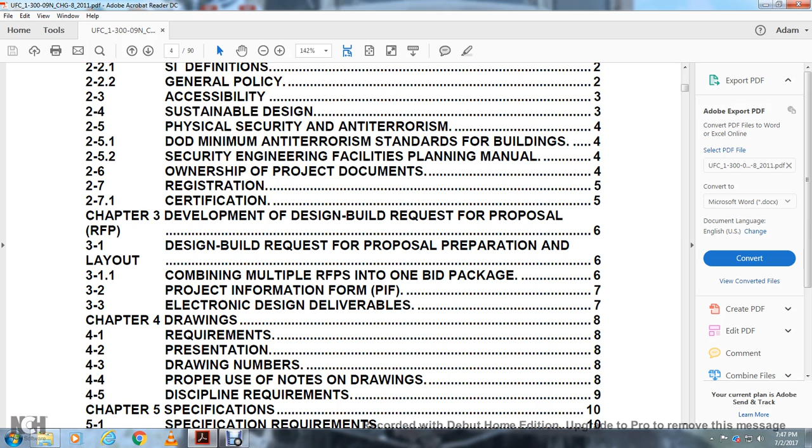Chapter 4: Drawing Requirements. Presentation, drawing numbers, proper use of notes on drawings, discipline requirements.

Chapter 5: Specifications. Specification requirements, guide specifications, Unified Facility Guide Specifications, regional guide specification, other guide specification, performance technical specifications, Unified Guides.

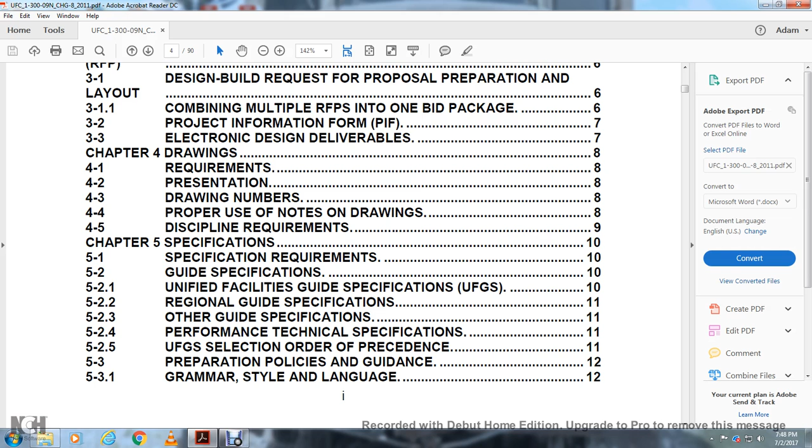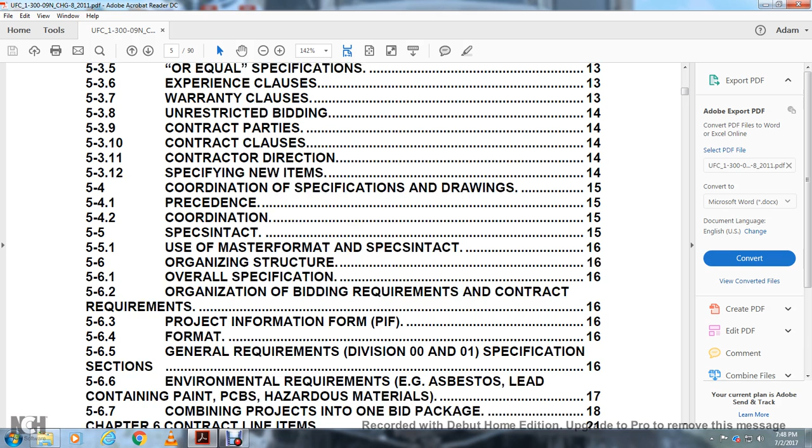Precedence, coordination, specs intact, use of master format, organizing structure, overall specification organization, bidding requirements and contract requirements, project information form format, general requirements, Division 00 and 01 specification sections, environmental requirements, asbestos, lead-containing paint, PCBs, hazardous material, combining projects into one bid package.

Chapter 6: Contract Line Item Selection. Contract line item schedule, option items, additive items.

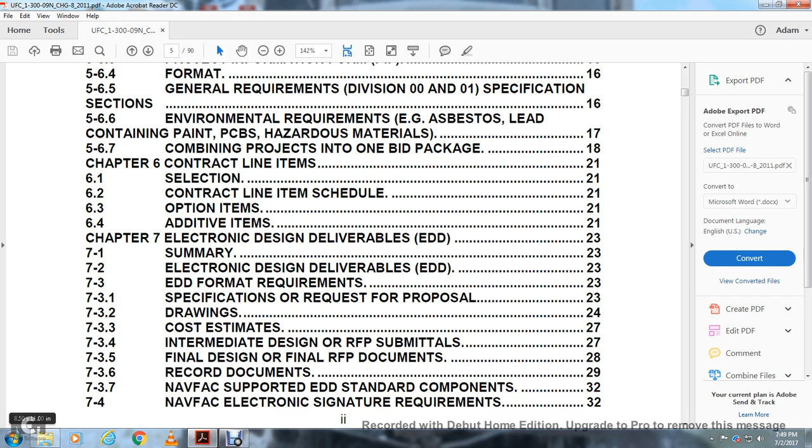Chapter 7: Electronic Design Deliverables Summary. Electronic design deliverables, EDD format, requirement specification, requirement proposal drawings, cost estimate, intermediate design request for proposal submittals, final design, final request for proposal documents, record documents, NAVFAC supported EDD standard components, Navy Facilities electronic signature requirements.

General requirements, specific software requirements, wet-signed documents, document signature requirements for design-build. Media organization, general and final submittal requirements, minimum record drawing submittal requirements.

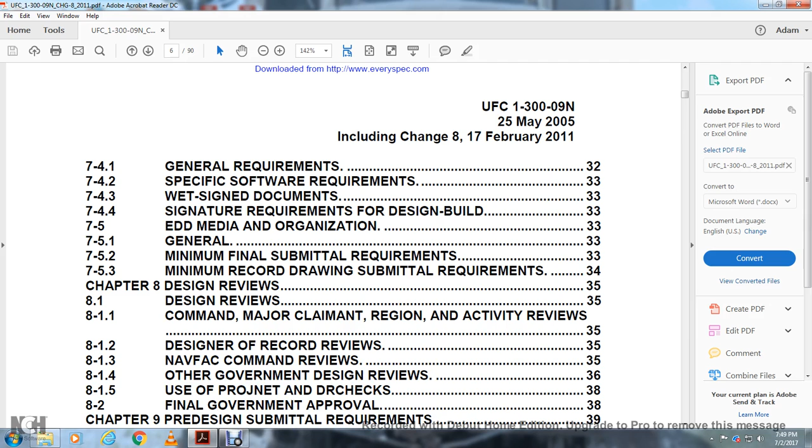Chapter 8: Design Reviews. Command, major claimant, region, activity reviews, designer of record reviews, Navy Facilities Command reviews, other government design reviews, use of ProjNet and DrChecks, the final government approval.

Submittal of the basis of design, drawing, calculations, charettes, functional analysis, concept development studies.

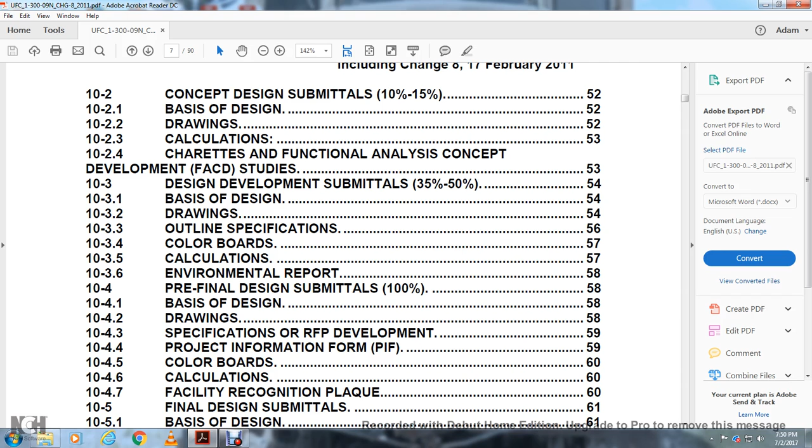Design development submittal at 35 to 50% basis of design, drawing, outline specification, color boards, calculation, environmental report, pre-final design submittal of the drawing, basis of design, drawing, specification, request for proposal, project information form.

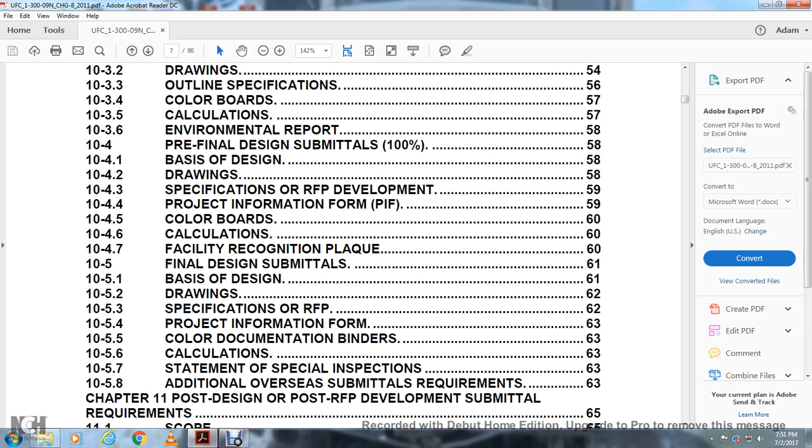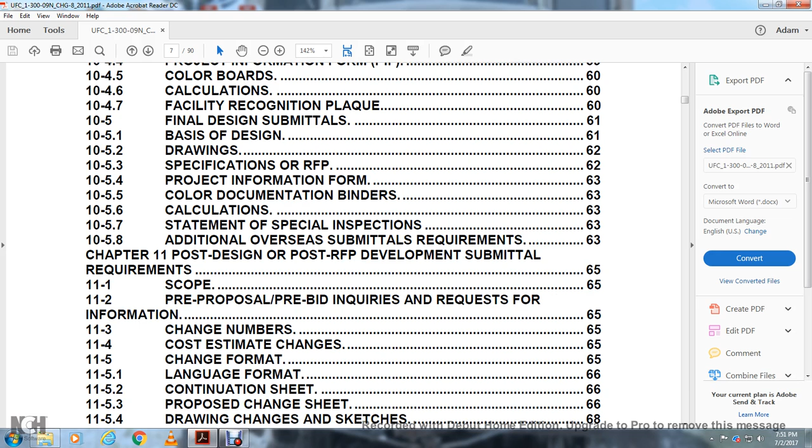Chapter 11: Post-Design, Post-Request for Proposal Development Submittal Requirements. Scope, pre-proposal, pre-bid inquiry with request for information, change numbers, cost estimate, change format, language format, continuation sheet, proposed change sheet, drawing changes and sketches.

Chapter 12: Post-Construction Documentation. Project closeout, record design. Glossary A, Appendix references, Appendix B, submittal resources. Table 1.1: Specification Request for Proposal Change Format. Table 2.1.2: Drawing Change Format. Figure 5.1: Sample Table of Contents, Combined Projects. Figure 7.1: Navy Facilities Approved Symbols. Figure 10.1: Quality Review Block. Figure 11.1: Sample Amendment. Figure 11.2: Sample Contract Modification.

Chapter 1, Introduction. Purpose and Scope.

The UFC provides the policy statement for the design, development, and revision of project documents, including drawings, specifications, and requests for proposal for facilities combined.

Cognizant of the Navy Facilities, the UFC has been developed to ensure consistency and clarity of project development, forming the basic contract for the design and construction of facilities.

1.1 Organization of the Document. The document is organized as design policy, including the policy with the critical nature to the design issue, the documentation, and design stages of pre-design and post-construction requirements.

Applicability: The UFC applies to all projects of the Navy Facilities and the activities of contractors preparing construction contract drawings, specifications, and requests for proposals for shore facilities. It is applicable for both design-bid-build and design-build projects. References: a list of all references used in the UFC is at Appendix A.

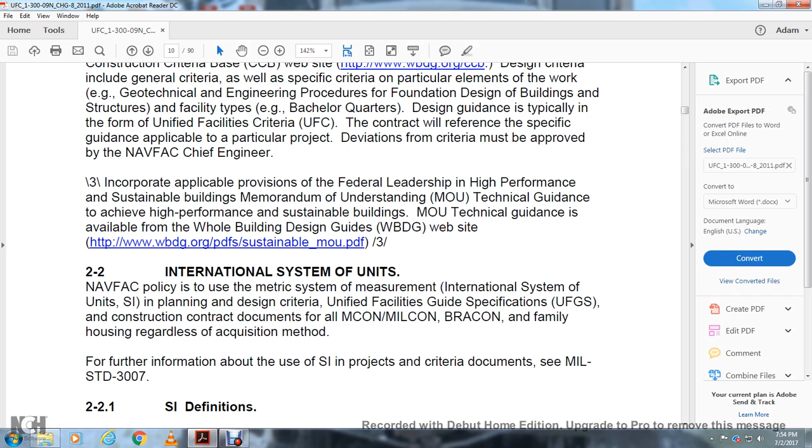The Unified Facilities Guide Specifications, or UFGS, applies to construction contract documents — MCON, BRACON, and Family Housing — regardless of the acquisition method. For further information on the use of SI units in projects and criteria documents, see MIL-STD-3007.

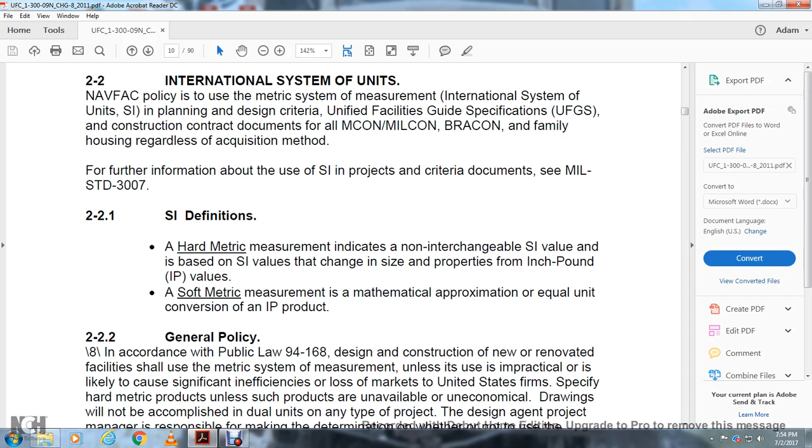SI definitions: hard metric measurements indicate the non-interchangeable SI value, based on the SI value with a change in the size and properties of the inch-pound value. Soft metric measurements mean mathematical approximations equal to the conversion of the IP product.

General policy: in accordance with Public Law 94-168, the design and construction of new and renovated facilities shall use the metric system of measurement unless it is impractical or likely to cause significant loss of markets to United States firms, specify hard metric products unless such products are unavailable or uneconomical.

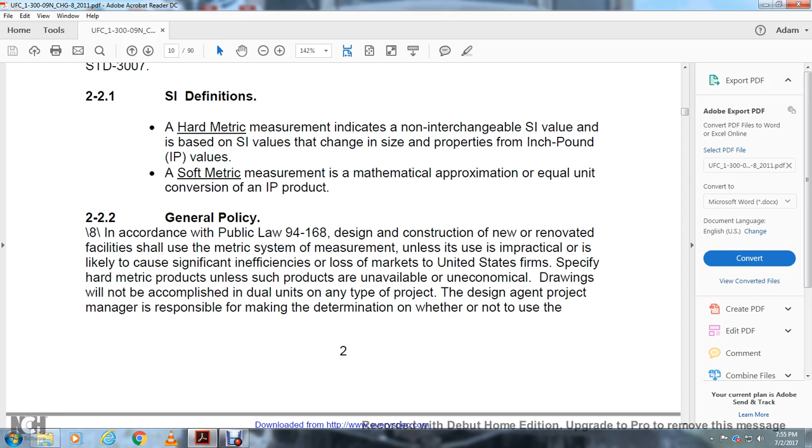Drawings will not be accomplished using dual units on any type of project. Design agents and project managers will be responsible for determining whether or not to use the metric system of measurement on a project-by-project basis. A decision not to use the metric system must be justified and documented in the project files.

Accessibility: barrier-free design should be in accordance with the requirements of the DoD ABA Memorandum on Accessibility for People with Disabilities, dated October 31st, 2008. The memorandum updates the DoD standard for making facilities accessible to people with disabilities.

The U.S. Access Board issued updated accessibility guidelines along with the DoD ABA Memorandum, which implements the military-unique requirements specified in the memorandum and its attachment.

The new DoD ABA, or Architectural Barriers Act, associated accessible standards from the DoD Memorandum are located at accessboard.gov, under the ADA-ABA database, ABA standards, Department of Defense, CFM.

Sustainable design: follow the requirements of NAVFAC Engineering and Construction Bulletin 2008-01, the Engineering Policy, and the Energy Policy Act of 2005, implementing USGBC LEED certification.

NAVFAC policy aims to reduce total ownership costs, including life cycle costs of shore facilities, by incorporating sustainable development principles and strategies into planning, programming, design, construction, operation, maintenance, sustainment, restoration, and modernization of all facilities infrastructure projects, to the fullest extent possible, consistent with mission, budget, and client requirements.

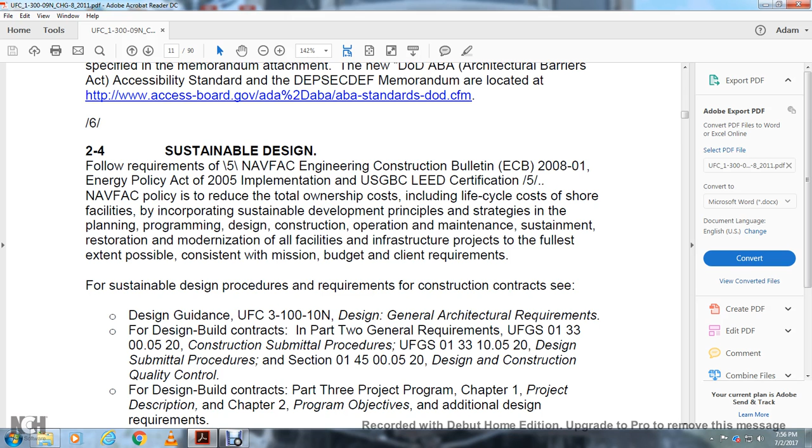For sustainable design procedure requirements in the construction contract, see the design guidance in UFC 3-100-10N, and the general architectural requirements for design-build contracts, along with the general requirements of UFGS.

UFGS 01 33 00.05 20, Construction Submittal Procedures; UFGS 01 33 10.05 20, Design Submittal Procedures; and Section 01 45 00.05 20, Design and Construction Quality Control for Design-Build Contracts, Part 3 Project Program.

Chapter 1, Project Description. Chapter 2, Project Objectives and Additional Design Requirements.

Projects must achieve at least LEED Silver level, unless justified conditions exist that limit the pursuit of the LEED credits necessary for achieving the certified level. The government determines the minimum sustainable LEED goals and verification methods.

2.5 Physical Security and Anti-Terrorism. DoD Instruction 2000.16, the DoD Antiterrorism Standard, and OPNAVINST 3300.53A, the Navy Antiterrorism Program, establish policy for physical security and anti-terrorism design.

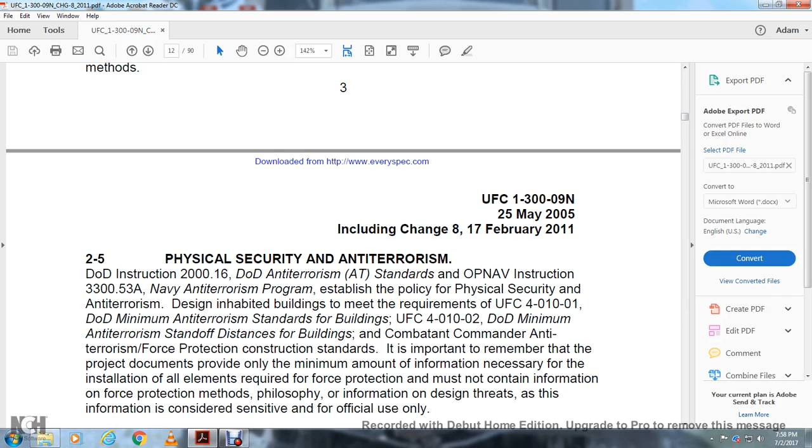Important: remember that the project documents provide only the minimum amount of information necessary for the installation. of all elements required for force protection, and must not contain information on force protection methods, philosophy, or design threat information, as such information may be considered sensitive or for official use only.

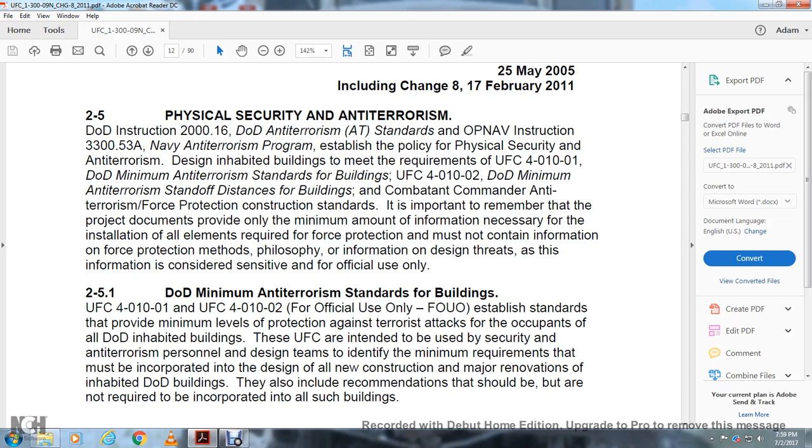The DoD minimum anti-terrorism standard for buildings, UFC 4-010-01 or UFC 4-010-02, is intended for use as the FOUO established standard to provide a minimum level of protection against terrorist attacks for occupants of DoD inhabited buildings. The UFC is intended to be used by security and anti-terrorism personnel and the design team to identify minimum requirements that must be incorporated into the design of all new construction and major renovations of inhabited DoD buildings. It also includes recommendations that should, but are not required to, be incorporated into all such buildings.

2-5.2 Security Engineering Facility Planning Manual. The UFC 4-020-01 Security Engineering Facility Planning Manual presents processes for developing design criteria necessary to incorporate security and anti-terrorism measures into DoD facilities, and identifies the cost implications of applying these design criteria.

Design criteria must be limited to requirements beyond the minimum standards, which may include issues such as protection of assets other than addressed in the minimum standards, protection of people, aggressor tactics not addressed at the minimum standards level, protection beyond the required minimum standards, and cost implications of security and anti-terrorism measures addressed in cost over conventional construction and common construction types.

Changes in construction representative of these increases are tabulated with reference to representative construction that meets the requirements of the design criteria of the manual. It also addresses the trade-offs between cost and risk.

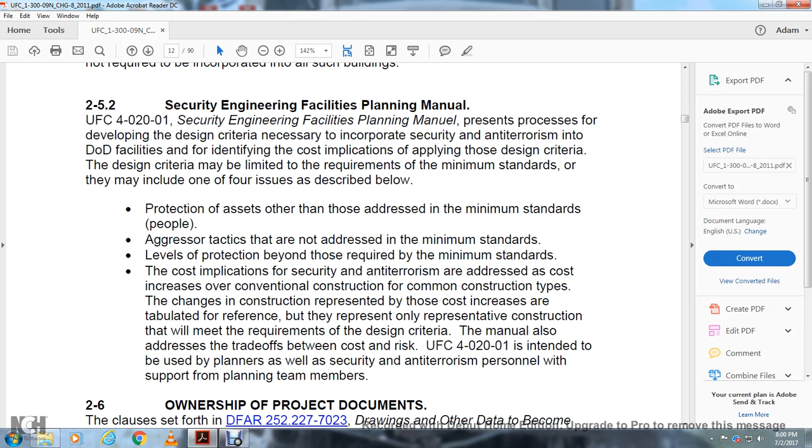The UFC 4-020-01 is intended to be used by planners as well as security and anti-terrorism personnel with the support of planning team members. 2.6, Ownership of the project documents.

Clauses set forth in DFARS 252.227-7023, drawings and other data to become property of the government; DFARS 227-71, review rights of technical data; and DFARS 227-72, rights of computer software documentation, apply to all project design documentation.

2.7 Registration. Development of stateside project documentation under the direction of a registered architect or professional engineer, currently licensed in accordance with FAR 52.236-25 requirements, for registration of the design and development of foreign project documents under the direction of a registered architect or professional engineer currently licensed by the United States or Commonwealth Territory, District of Columbia, or by the foreign country in which the project is to be built.

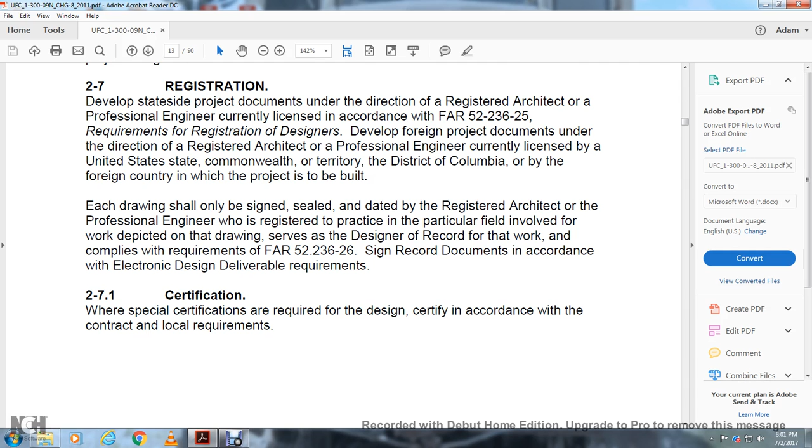Each drawing should be signed, sealed, and dated with the stamp of the registered architect or professional engineer registered in the practice of the particular field involved for the work depicted on the drawing, serving as the designer of record for that work and complying with the requirements of FAR 52.236-26, signing record documents in accordance with the electronic design deliverable requirements, 2.7.1. Where special certifications are required for the design, certify in accordance with the contract and local requirements.

Chapter 3, Development of the Design Build Request for Proposal.

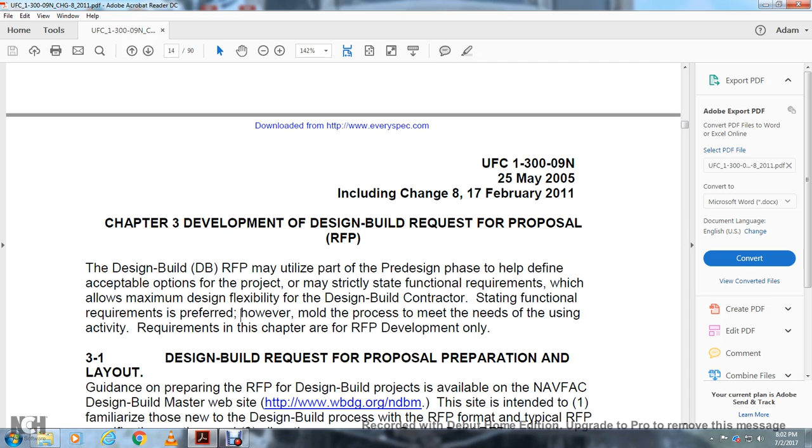The Design Build Request for Proposal may utilize the pre-design phase to help define the acceptable options for the project. It may strictly state functional requirements while also maximizing design flexibility. Design build contractors stating functionality requirements is preferred; however, mold the process should meet the needs of the using activity requirement covered in the chapter on request for proposal development.

Design build request for proposal preparation and layout guidance for preparing the request for proposal for design build projects are available on the NAVFAC Design Build Master website, or the Whole Building Design Guide, at wbdg.org/ndbm, or NAVFAC Design Build Master.

The site is intended to, one, familiarize those new to the design build process with the request for proposal format, typically the request for proposal sections, and two, allow those preparing the design build request for proposal to download an electronic document.

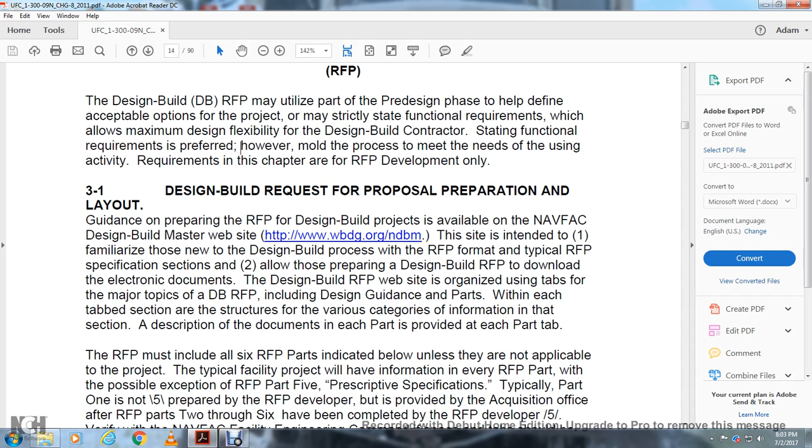The design build request for proposal website is organized using tabs for the major topics, of a DB request for proposal. The design build request for proposal, including design guidance and parts within each tab-related section, is structured for the various categories of information in that section. A description of the documents in each part is provided under each tab.

The request for proposal must also address the 6 request for proposal parts indicated below unless all are non-applicable to the project. The typical facility project will have information in every request for proposal part, with the possible exception of request for proposal Part 5, prescriptive specifications.

Typically, Part 1 is not prepared by the request for proposal developer; it must instead be provided with the acquisition office. Request for proposal Parts 2 through 6 are to be completed by the request for proposal developer, verified with the NAVFAC Engineering Command.

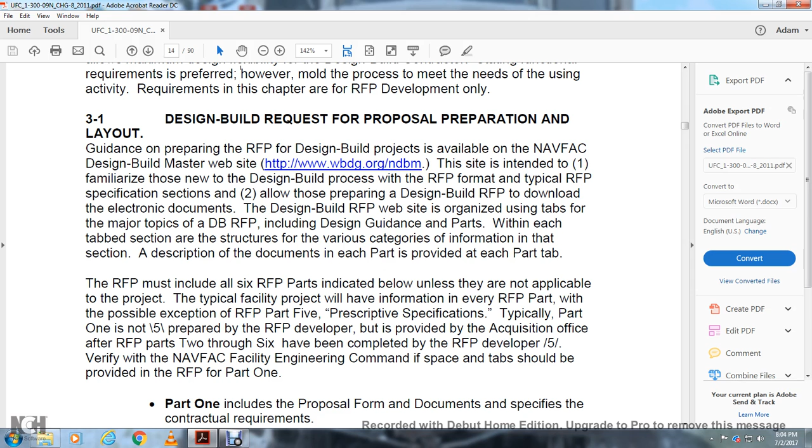The set of tabs should be provided with the request for proposal. Part 1 includes proposal form documentation specifying the contractual requirements. Part 2 contains the general requirements specification section, some only available on design build websites.

Part 3 contains the project program for the project. Part 4 contains the performance technical specification. Part 5 contains the prescriptive specifications required for the design build request for proposals. Part 6 is attachments, including boring logs and references to drawings.

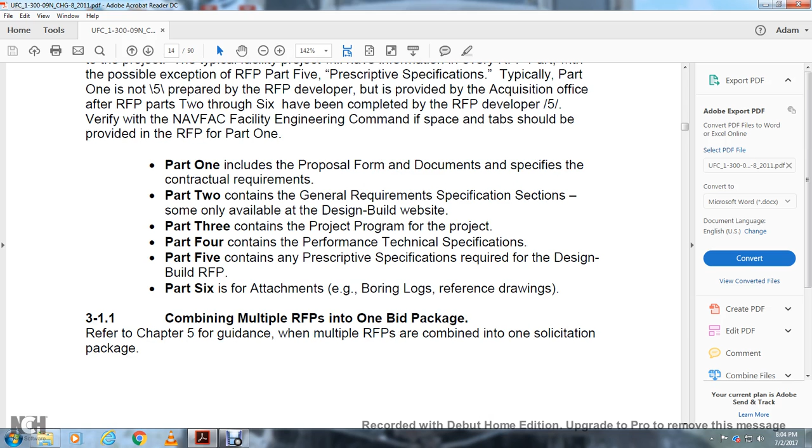3.1.1, Combining multiple requests for proposals into one package. Refer to Chapter 5 of the guidance for the request for proposal regarding combining multiple requests for proposals into one solicitation package.

3.2 Project information form, provided with the complete projection information, the pre-final with the final submitted with the projection information form that's available electronically on the Whole Building Design Guide's website, located at wholebuildingdesignguide.org, CCB, or under Specification Library, NAVFAC Specifications.

Electronic design deliverables provide the request for proposal electronically in accordance with Chapter 7, Electronic Design Deliverables, organizing the request for proposal into 1 or 2 PDF files in order to show the table of contents, bookmarking each of the items below, and additional items as indicated.

Request for proposal cover sheet, Part 1 divider when directed by the command. Overall request for proposal table of contents, Part 2, Part 2 divider and Part 2 table of contents, Part 2 specification section, bookmark the first page of each section. Part 3 divider, Part 3 project program cover sheet, Part 3 table of contents, Part 3 project program.

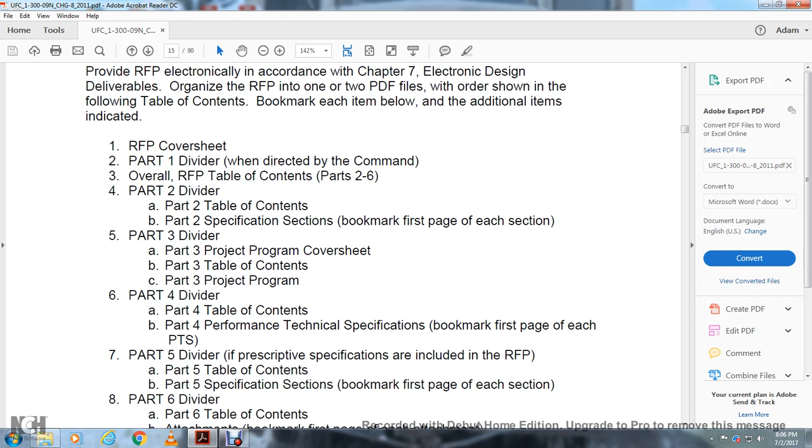Part 4 divider, Part 4 table of contents, Part 4 performance technical specifications, bookmark first page of each of the PTS or performance technical specifications. Part 5 divider, if prescriptive specifications are included in the request for proposal, Part 5 table of contents, Part 5 specification section, bookmark the first page of each section. Part 6 divider, Part 6 table of contents, attachments, bookmark first page of each attachment.

Chapter 4, Drawings requirements. Prepare the drawings in accordance with Chapter 7, Electronic Design Deliverables, as required herein. Presented drawings shall be consistent with the presentation format of one of the disciplines, showing the material selection directly on the detail. Other disciplines should conform to that format, not use to refer to the numerical legend elsewhere on the drawings.

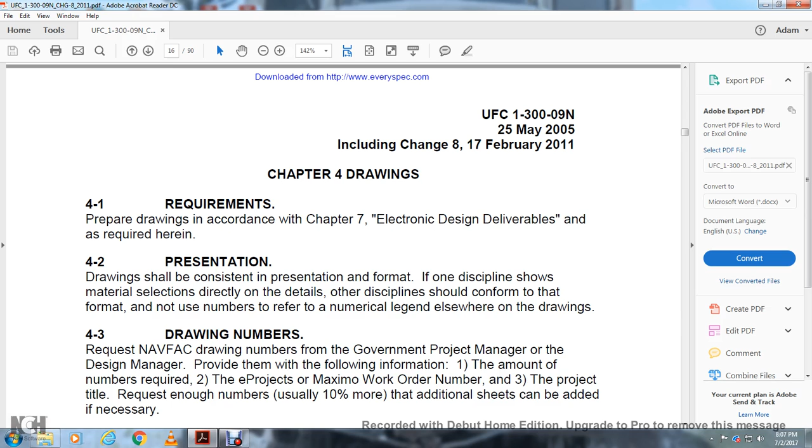Drawing numbers: request the NAVFAC drawing numbers, the government project manager or the design manager should provide them with the following information: the amount of numbers required for each project, the Maximo work order number, the project title, and the request for enough numbers, usually 10% or more. Additional sheets can be added if necessary.

Be consistent with the grammar used with the notes on the drawing. Whenever possible, use statements that describe work accomplished by the contractor. For example, instead of using 'contractor shall provide,' use 'provide,' is understood the notes are written with the contractor's action. Do not use 'to be' when describing work to be accomplished by the contractor. 'To be' implies that someone other than the contractor is accomplishing the work, such as the government or another contractor.

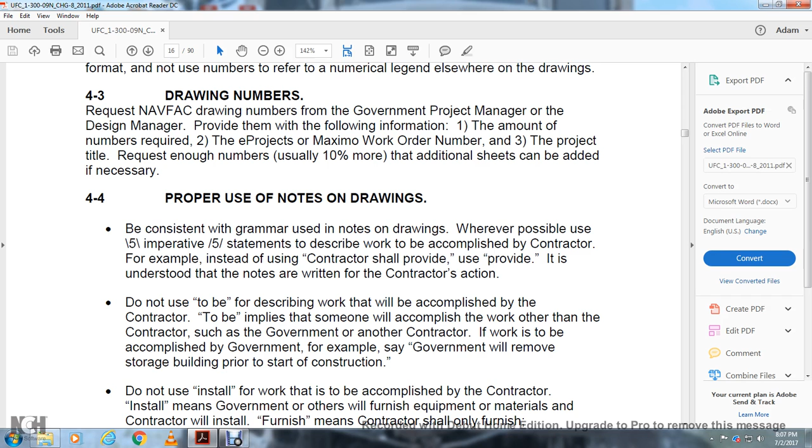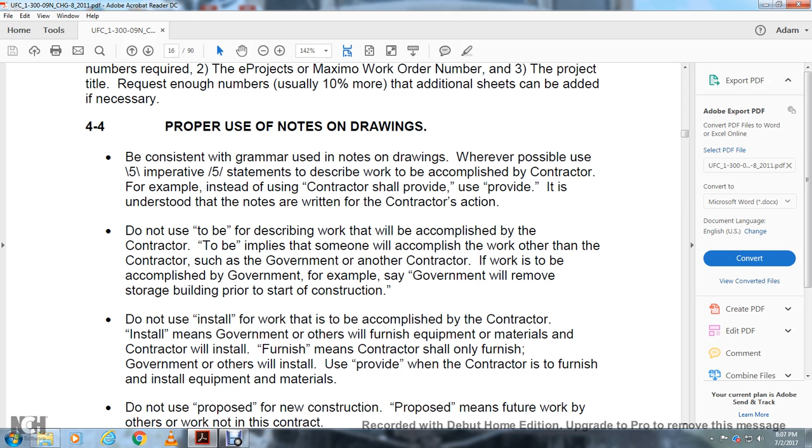If the work is to be accomplished by the government, for example, say 'government will remove storage building prior to starting construction.' Do not use 'install' for work to be accomplished by a contractor. 'Install' means government or other furnished equipment and materials, and contractor will install. 'Furnish' means the contractor shall only furnish, the government or others will install. Use 'provide' when the contractor is to furnish and install the equipment or materials.

Do not use 'proposed' for new construction. 'Proposed' means future work, or otherwise means work not in this contract. Do not use 'new' for work in the contract. All work shown on the drawings is considered new unless indicated otherwise. Inconsistent use of 'new' throughout the drawings could imply that only some of the work is required.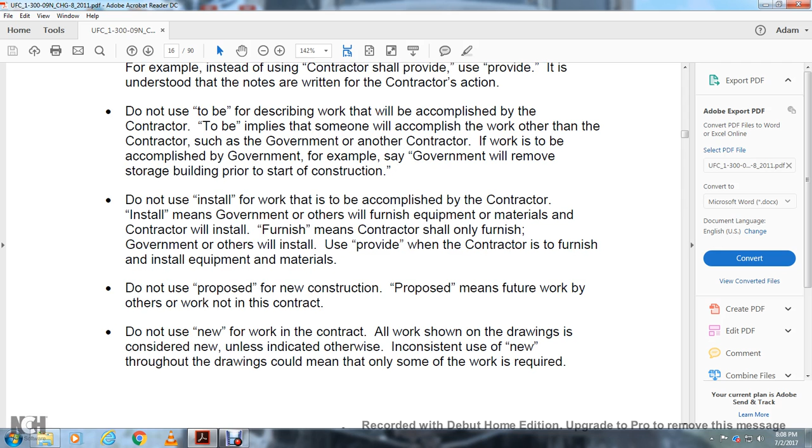Do not use ambiguous statements that can't be enforced by the inspector during construction, for example, 'grade to drain' or 'hand excavate carefully,' or 'provide materials in good condition.' Be careful with statements like 'remove and replace,' which means to remove the old item or material and replace that same item or material when the work is completed. This statement would be appropriate for work on a pump station where the pumps were removed prior to the work, and the same pumps replaced after the work is completed.

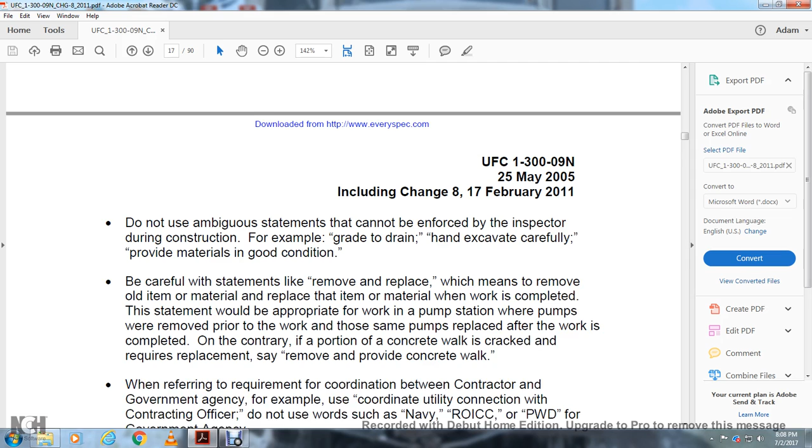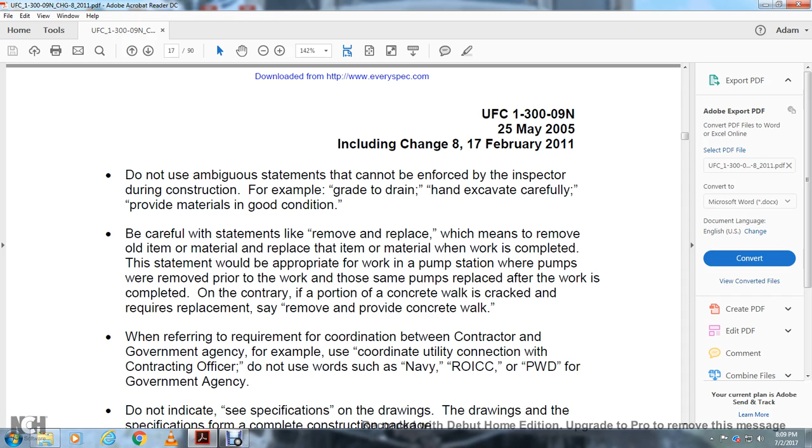On the contrary, if a portion of the concrete walk is cracked and requires replacement, say 'remove and provide concrete walk.' When referring to a requirement for coordination between contractor and government agency, for example, coordinate utility connection with the contracting officer, do not use words such as Navy, ROICC, or Public Works PWD for the government agency. Do not indicate specifications on the drawing; the drawings and the specifications form a complete construction package.

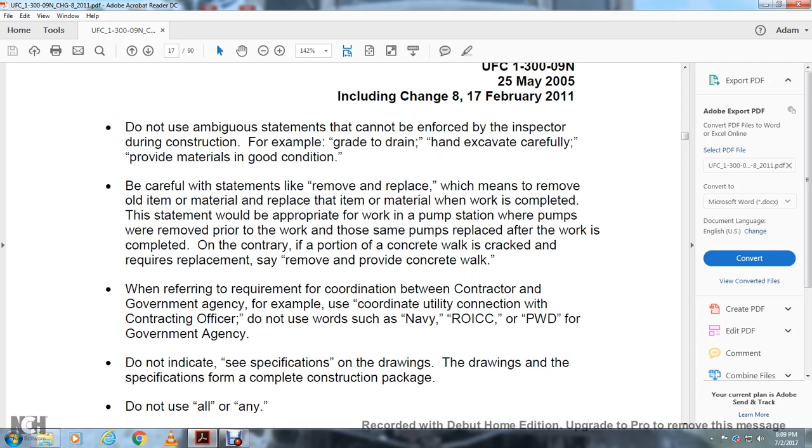Do not use 'all' or 'any.' Do not use words that have multiple meanings but require opinions or judgmental decisions, such as timely, nearly, good condition, suitable, well-balanced, suitable for intended use, reasonable, approximate, reliable, proper, usable, appropriate, adequate, or qualified. Do not use words that are not biddable by the contractor nor enforceable by the government.

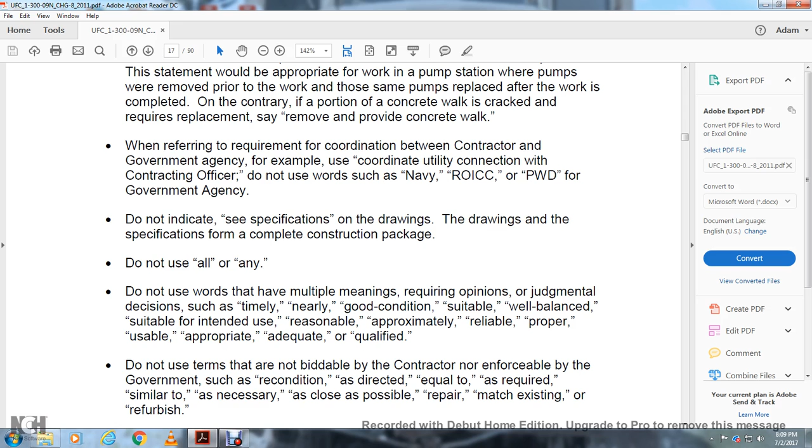Such words include: recondition, as directed, is equal to, as required, similar, as necessary, as close to as possible, repair, matching, existing, or refurbish. Some terms are only enforceable if the quantities are shown in the drawings or specifications, such as indicated, shown, as specified herein, and as noted.

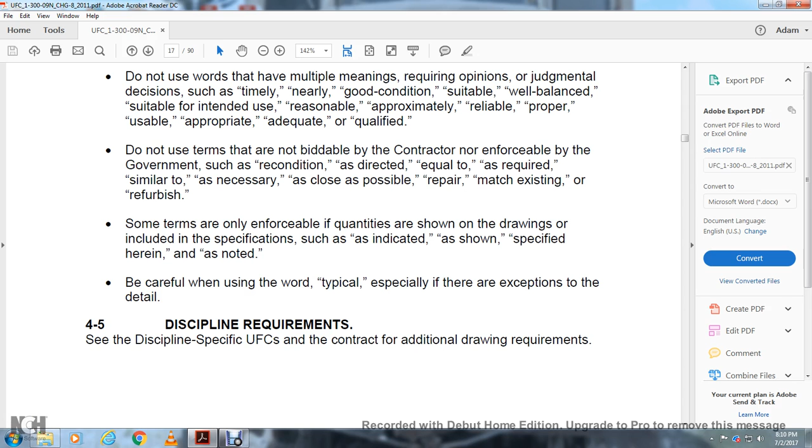Be careful when using the word 'typical,' especially if there's an exception to the detail. Section 4-5, discipline requirements: see the discipline specifics of the Unified Facilities Criteria and the contract for additional drawing requirements.

Chapter 5, Specifications.